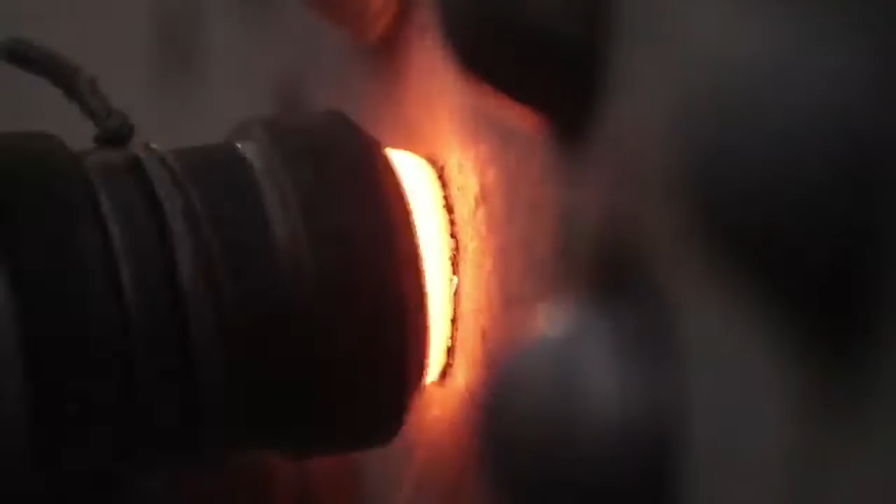But for any change to happen, you need a vision fueled by an ambition. Because everything happens twice, first in the mind and then in the world outside.

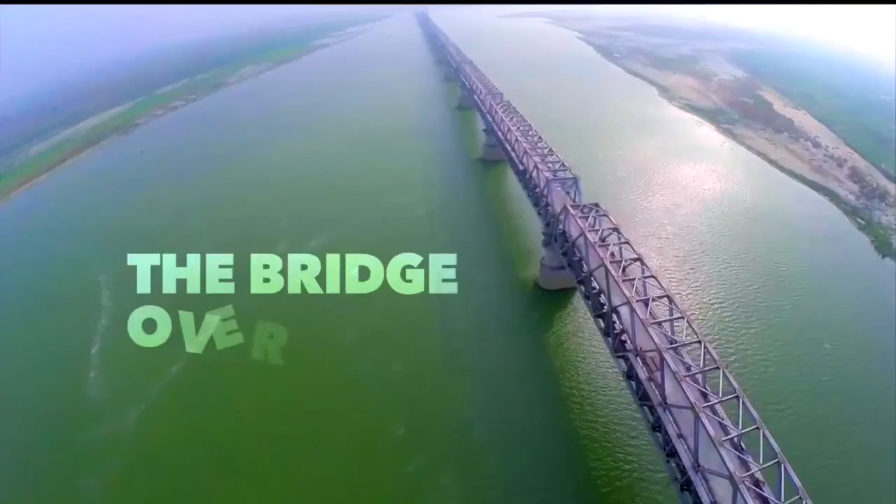The river Ganga, ancient, revered and sacred. Originating from the Himalayas, it reaches the plains, flowing merrily as it meanders its way through the Gangetic plains. By the time it reaches Bihar, the Ganges basin has extended to about 700,000 square kilometers, and the river becomes a white giant that separates the state in two.

With passage of time, this divide has led to an unequal distribution of resources and opportunities in the state of Bihar. For economic potential to be tapped to the fullest, the need to bridge this divide has become critical.

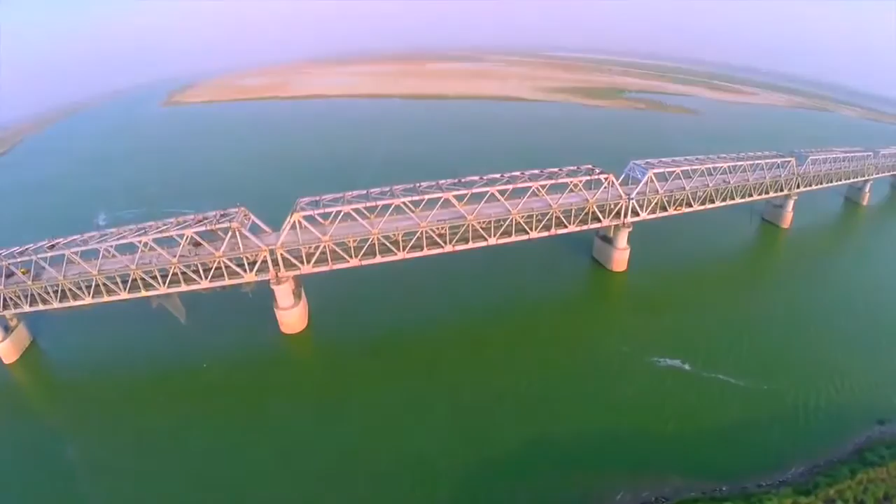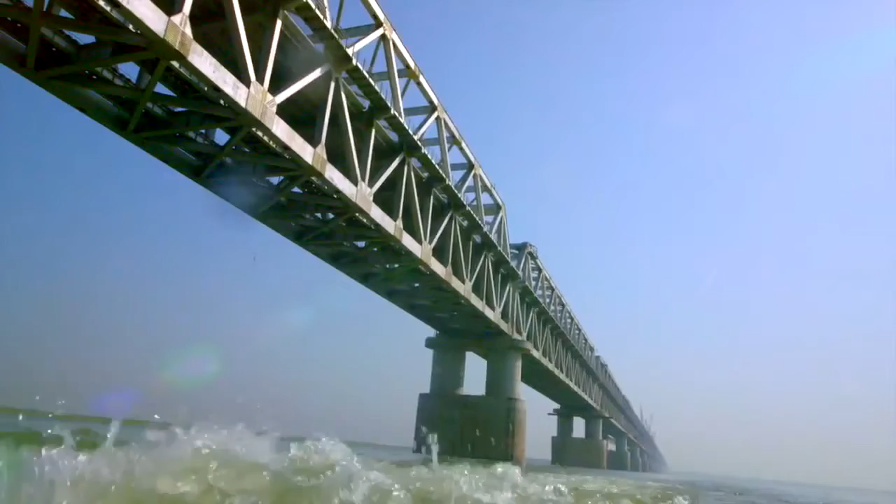IRCON was associated with this bridge in June 2008 when the Ministry of Railway awarded this work to IRCON, and since then there have been various developments over a time span of about 7 years, and now we are seeing the end of the work and commissioning of the railway line, which is going to link the southern part of Bihar across the river Ganga to northern Bihar.

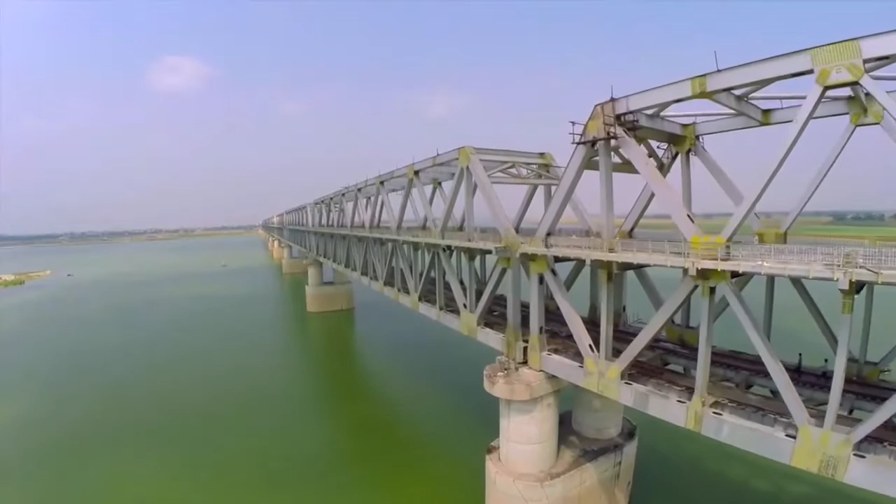36 spans of 123 meters along with 2 shore spans of 64 meters each, and 2200 tons of steel in each of these spans and 100,000 rivets. This is the longest and the heaviest superstructure on Indian Railway.

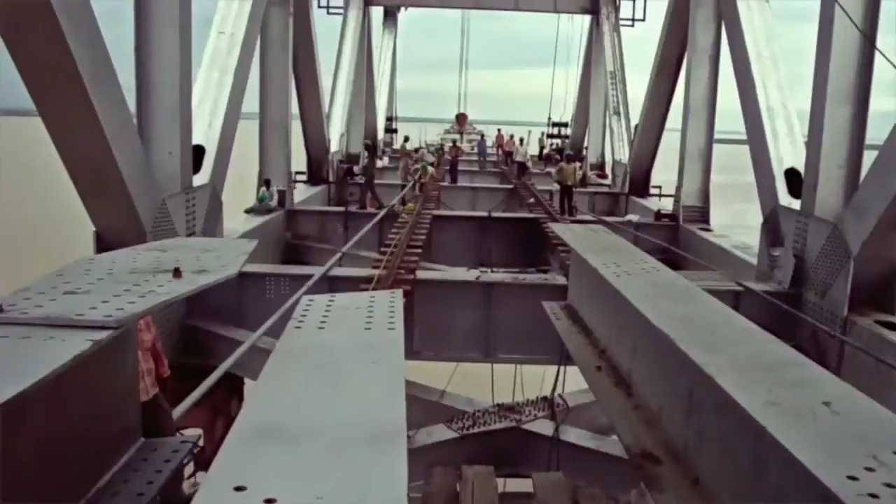The erection of superstructure started in September 2010. Floodplains were reclaimed with boulders and earth filling to construct the first anchor span, and within a span of 4.5 years, all 36 spans of 80,000 metric tons of steel were mounted over River Ganga. This 4.56 kilometer bridge is Indian Railway's longest truss bridge.

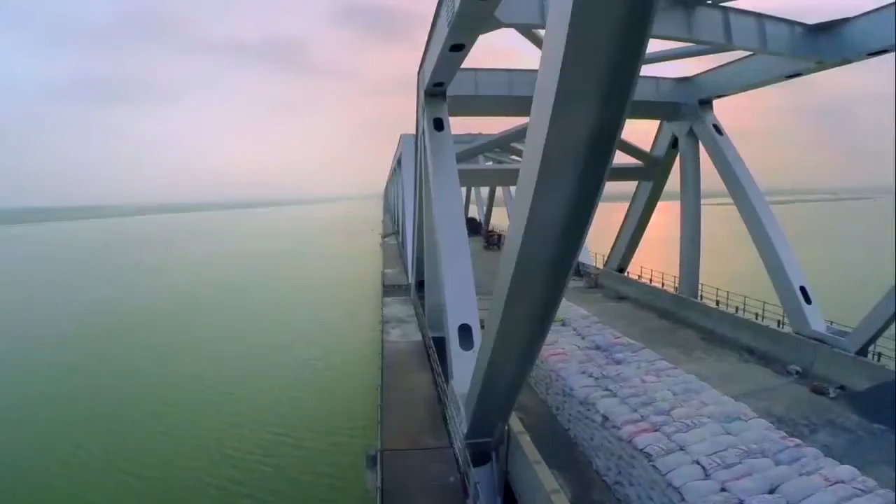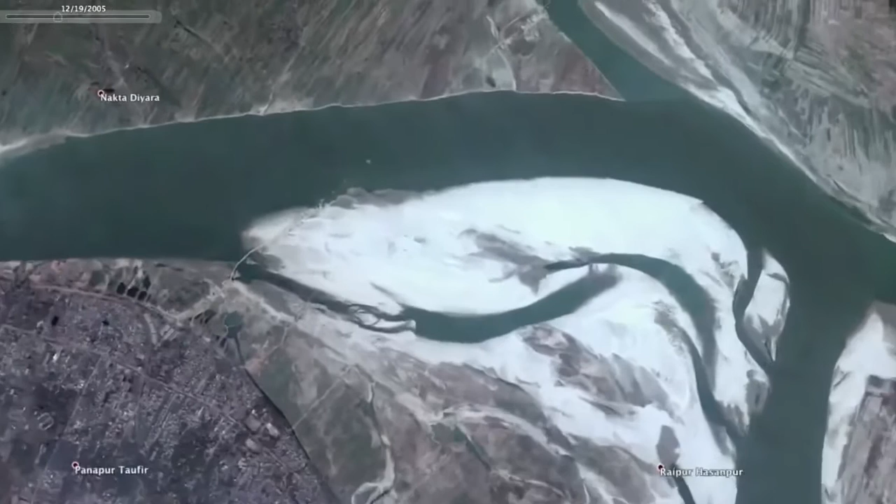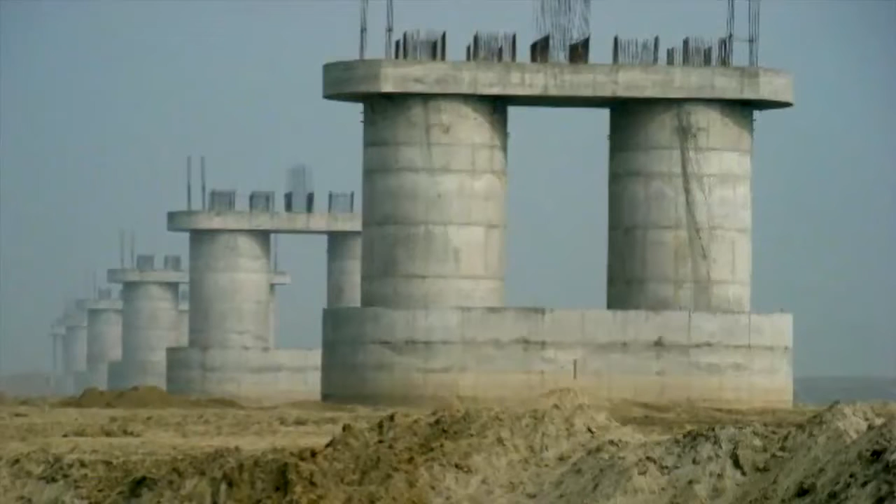The foundation laying had already begun in 2002. It was decided by the ministry to add a roadway above the railway track. By that time, the foundation and the substructure were already complete.

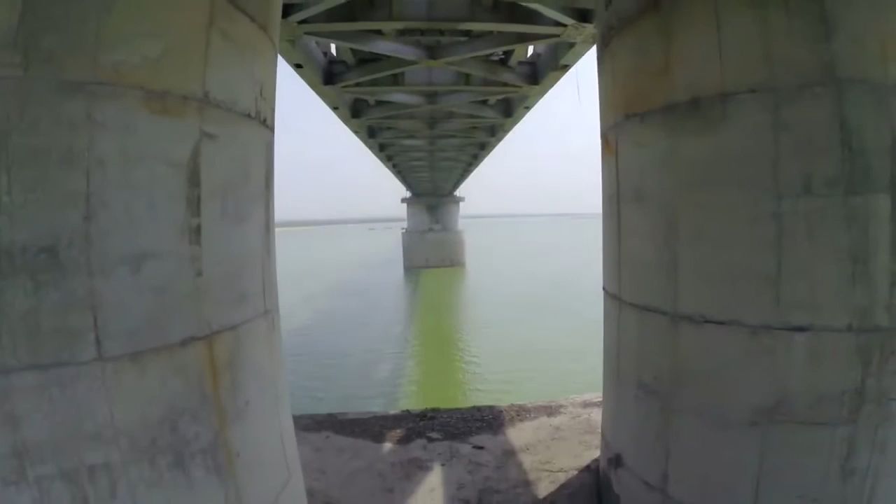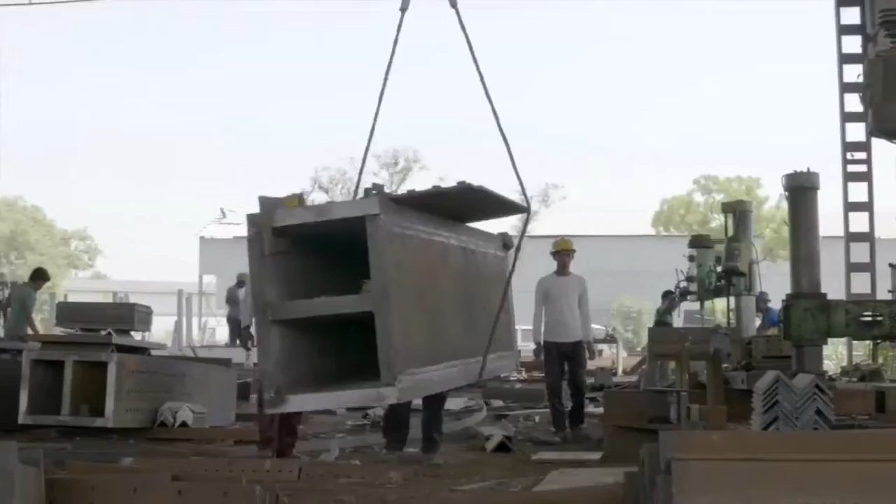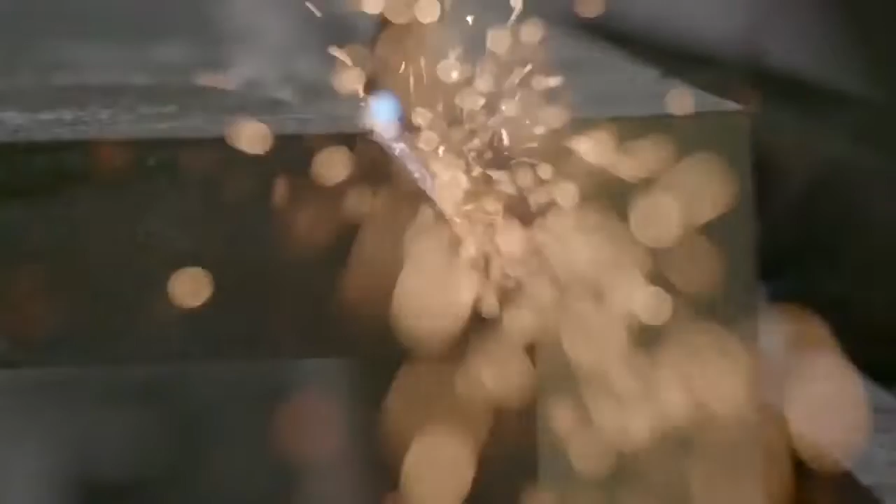To optimize the steel work, we had to go for higher grade of steel E450 so that the overall tonnage of the steel could be reduced, the dead weight of the superstructure could be reduced. But nonetheless, we had to use members as thick as 62 millimeters. Fabrication with 2.5-inch steel plate was itself a task.

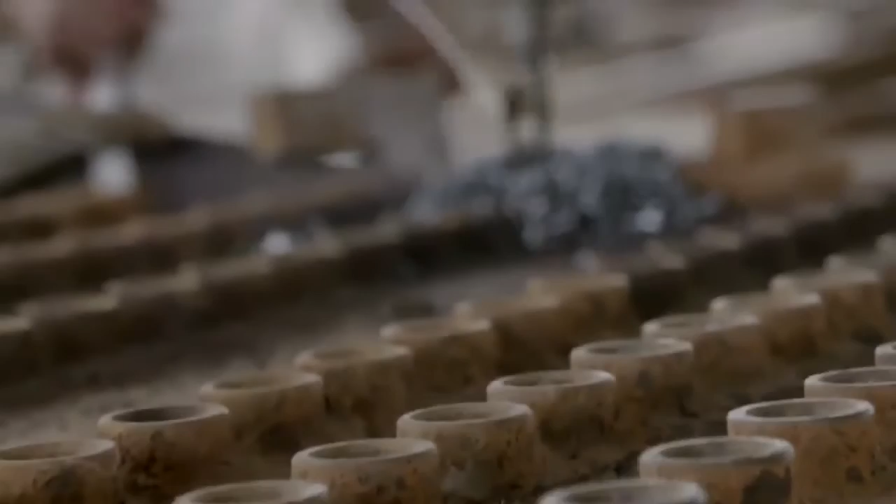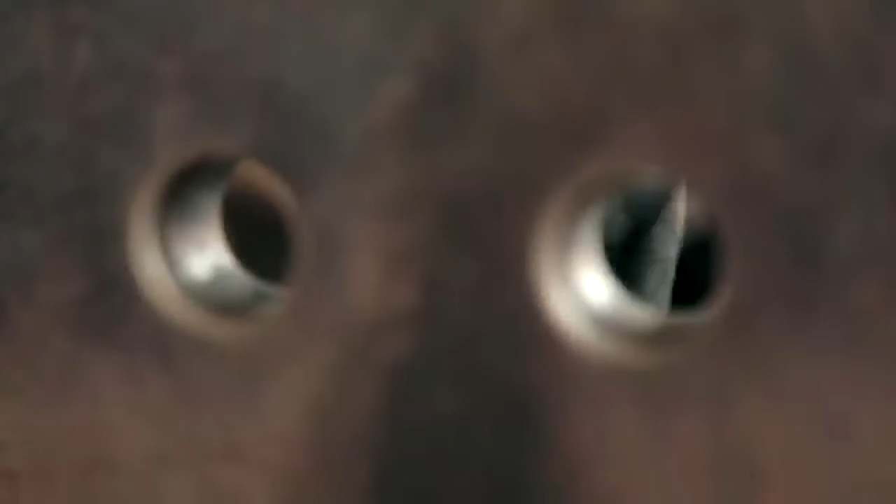Special radial drills and guide jigs become essential when numerous identical drill holes are needed in large numbers. The drill needs to be precise and absolutely correct in position. Once drilled, these plates will become part of a bigger steel component of the bridge superstructure. Then, these plates are welded to form a member of the steel truss.

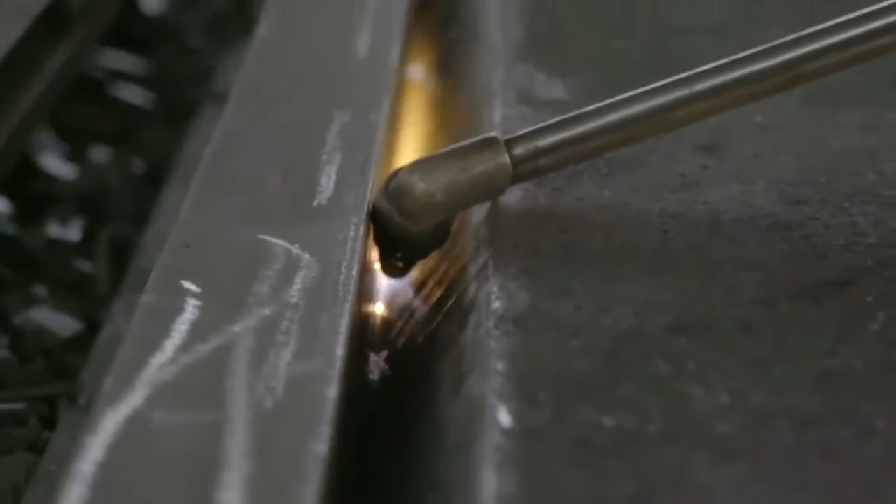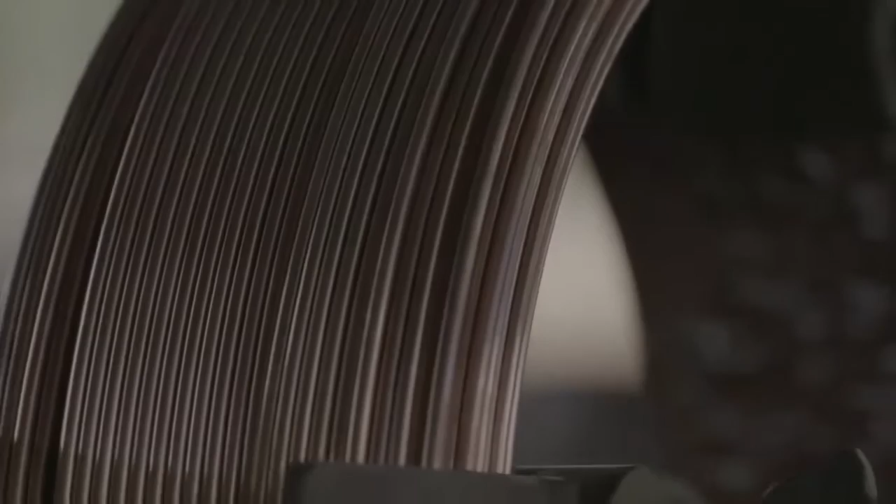A special welding technique, submerged arc welding, is being implemented. It involves formation of an arc between continuously fed bare wire electrode and the workpiece. The process uses a flux to generate protective gases and to add alloying elements to the weld pool. When molten, the flux becomes conductive and provides a current path between the electrode and the workpiece.

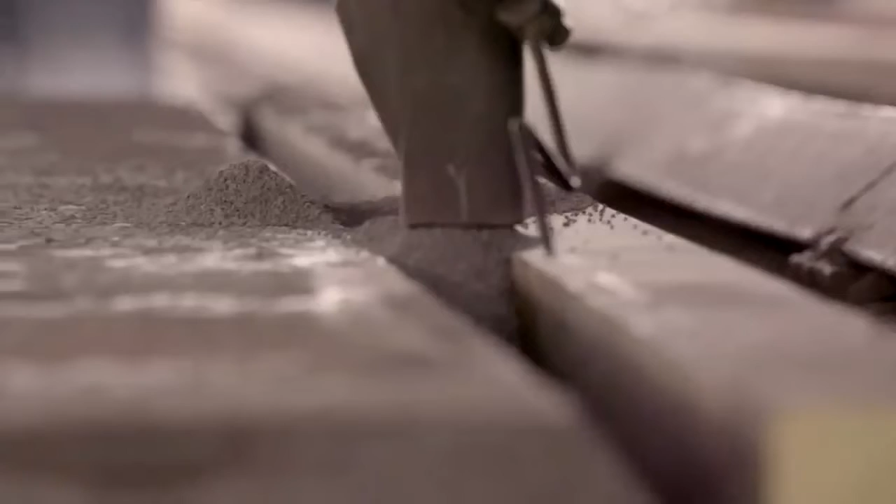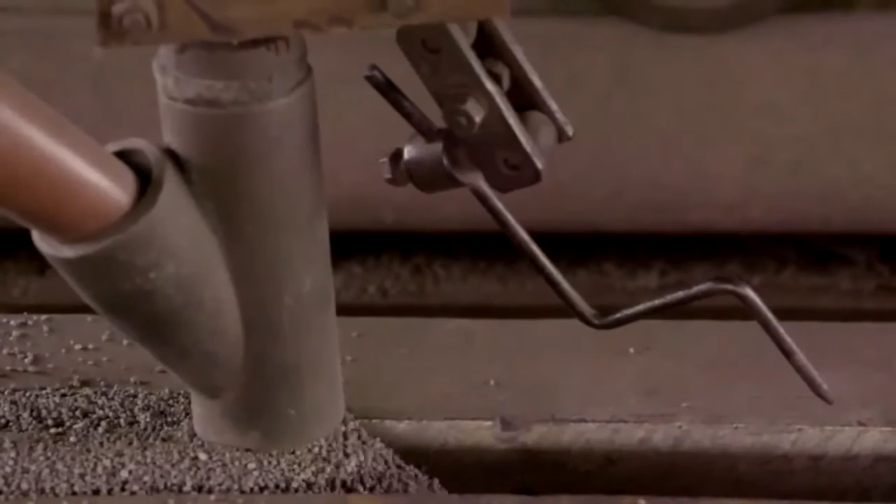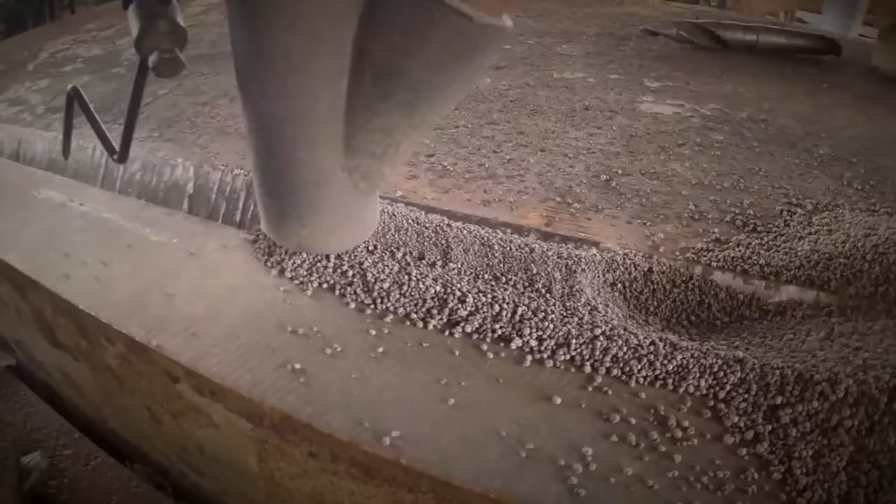The molten weld and the arc zone are submerged under a granular fusible flux consisting of lime, silica, manganese oxide, calcium fluoride, and other compounds. This prevents any atmospheric contamination. Since the operator cannot observe the weld pool, great reliance must be placed on parameter setting and positioning of the filler wire. As the arc is completely covered by the flux layer, heat loss is low. There is no visible arc light, the welding is spatter-free, and there is no need for fume extraction.

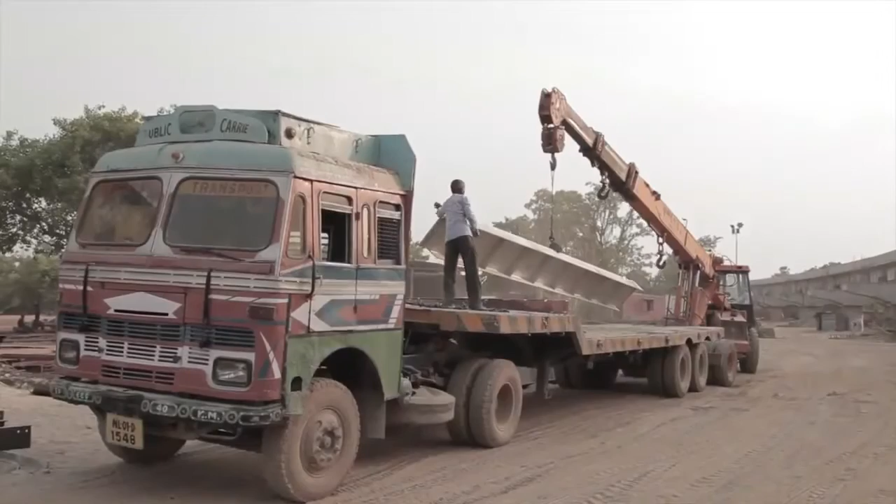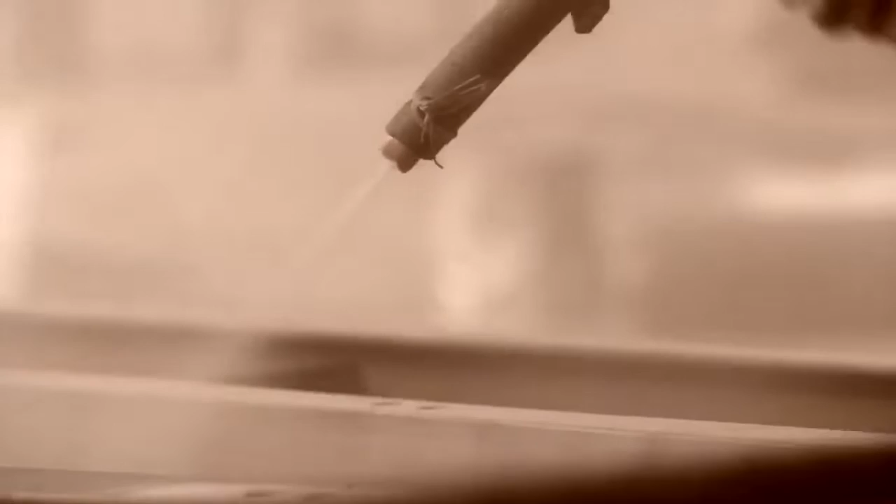Once the steel is welded, it is thoroughly checked for perfection by dye-penetrant testing. Here the white color shows the weld is seamless. The prefabricated steel components are then sandblasted and metallized. Sandblasting involves propelling very fine bits of sand at high velocity to clean the steel surface. Once sandblasted, the steel is metallized with a coat of aluminium. This will provide environment and corrosion protection to the steel for decades.

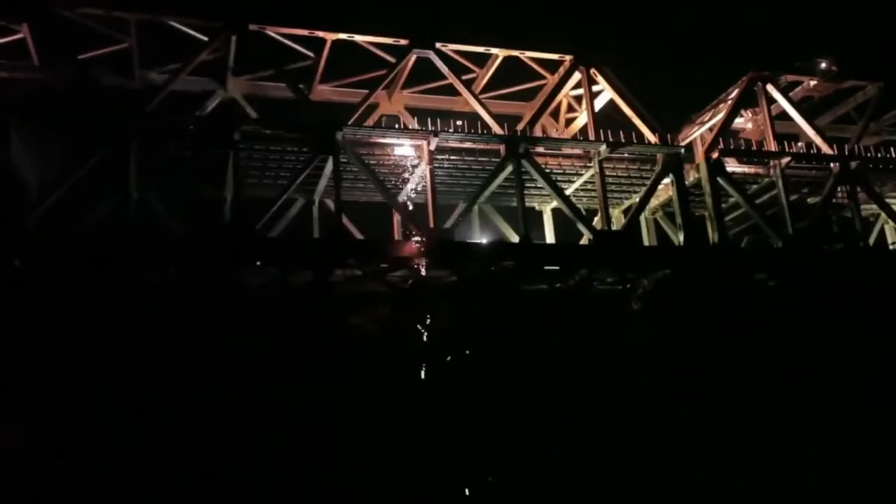The steel truss cantilever bridge was a major engineering breakthrough when first put into practice. It can span distances over 460 meters and can be more efficiently constructed at difficult locations by virtue of using little or no structural reinforcements. The construction begins with one span on ground. This serves as the anchor span for cantilever cranes mounted on top of the steel superstructure.

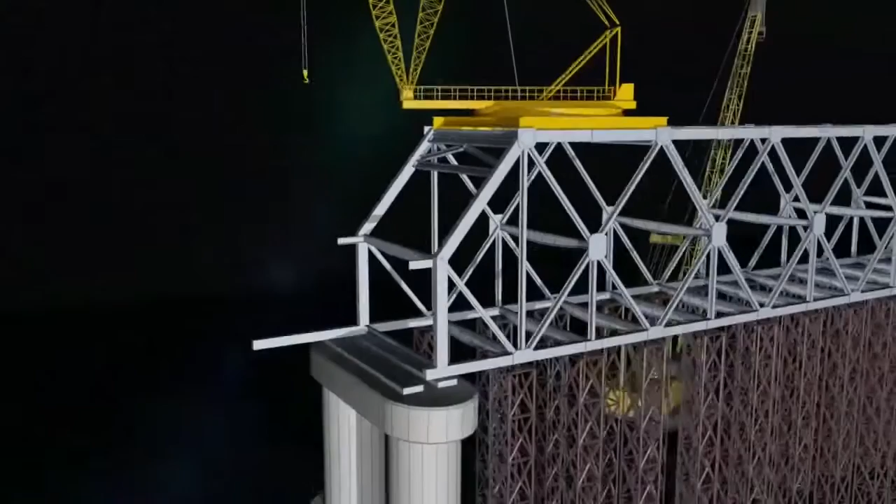Supported by a link member which holds the free end, these cranes build the next span member by member, launching ahead without any other propping from the ground. The cranes move on top, along the truss structure, adding one member at a time, forming an entire span from the free end, and land on the next pier.

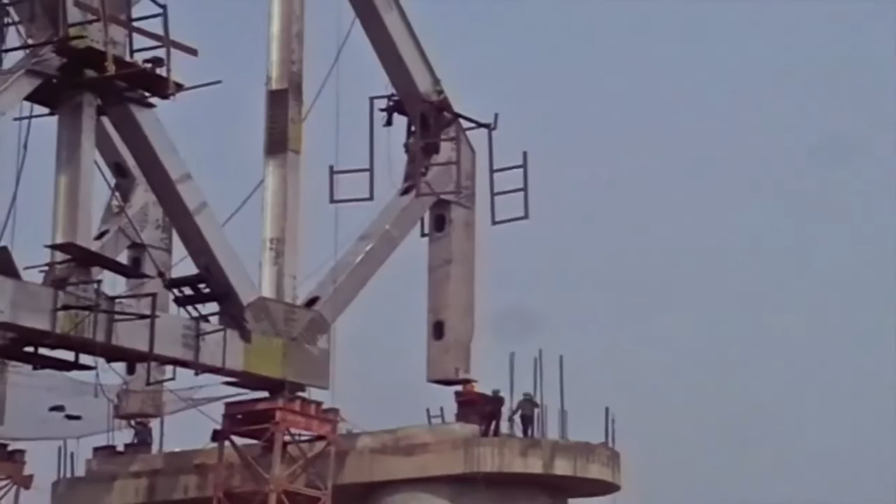Before cantilever launching of a new span, the bottom chord of the new span is blocked for any backward horizontal movement. It is done by inserting a buffer block between the bottom chord of the anchor span and the bottom chord of the new span. The vertical movement of the buffer block is monitored to assess the vertical deflection caused at the far end of the new span being launched.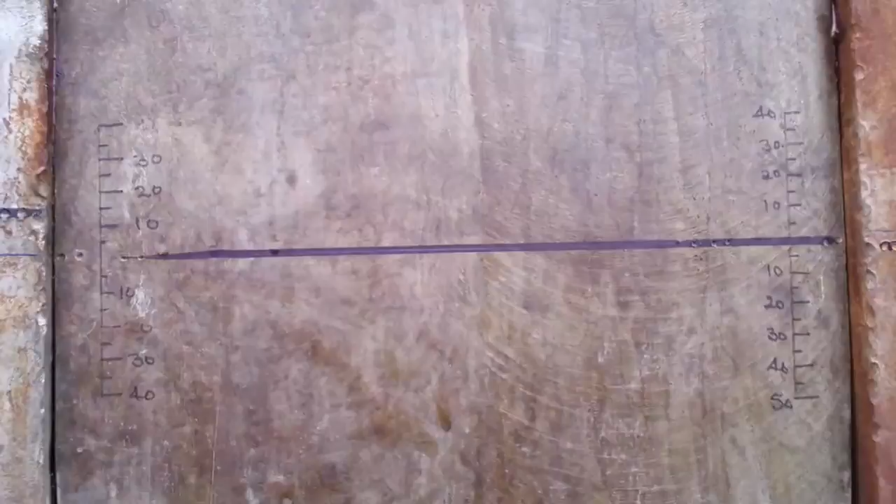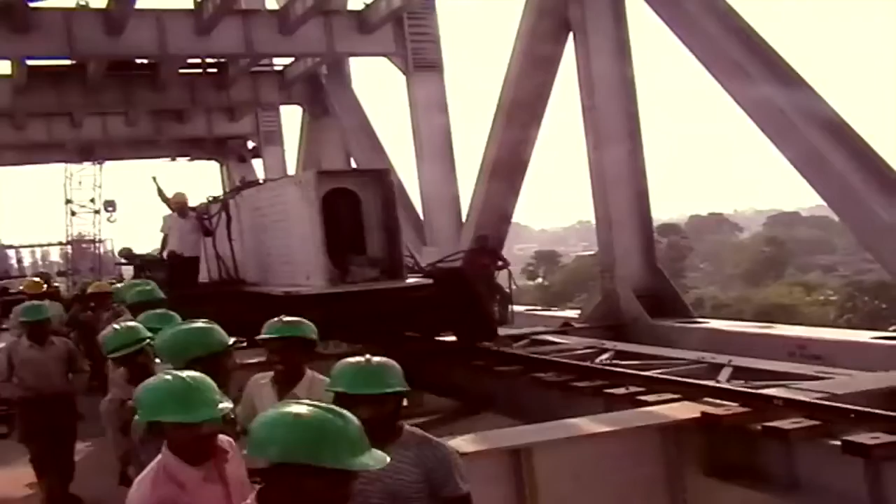For cantilever launching, the fabricated members were lifted to the rail level by ground cranes, then transported on temporary tracks. At the launch end, these members were lifted by cantilever cranes and fixed with drifts and bolts. On one single span of the superstructure, there are over 100,000 rivets.

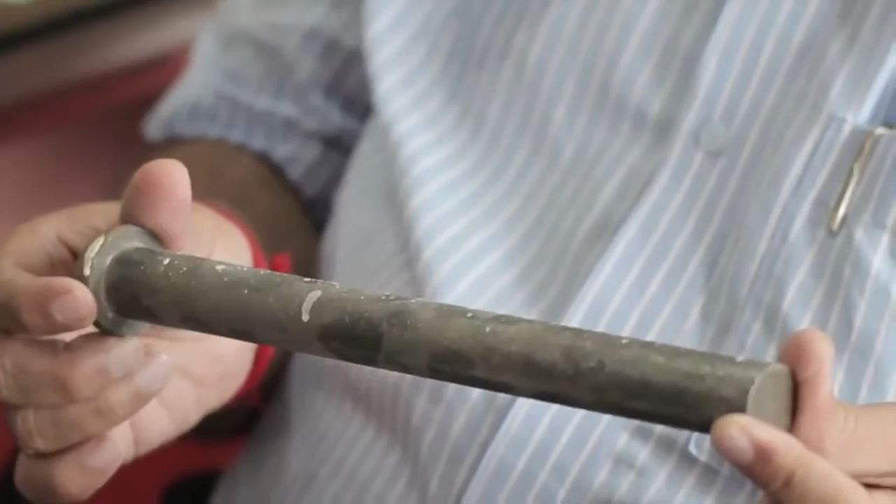A rivet is a permanent mechanical fastener. It is a smooth cylindrical iron shaft with a head on one end. The end opposite to the head is called the tail. It is heated and immediately placed in a drilled hole.

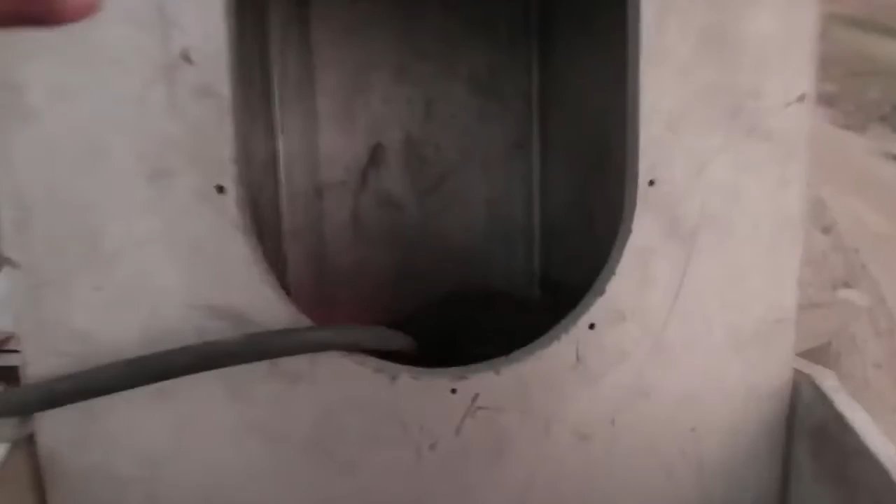And the red hot tail is then pounded to form a new head. In other words, pounding creates a new head on the other end, resulting in a rivet that once cooled has fixed itself permanently on both ends. These rivets hold the steel components fastened together permanently.

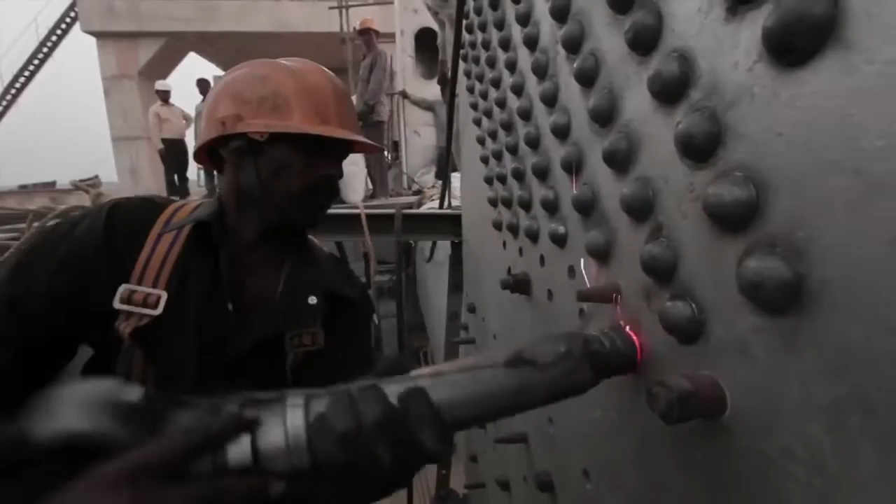In order to accomplish the task more efficiently, the engineers started construction from both sides and had plans to open a third front. But the forces of nature had something else in store for them. This island, before 2013 floods, protruded beyond this 11th span of the bridge, up to say 100 meter on the downstream side. And suddenly, in the floods of 2013, this got washed out. It was a very big challenge for us. Then how to continue with our ambitious plan of a third front?

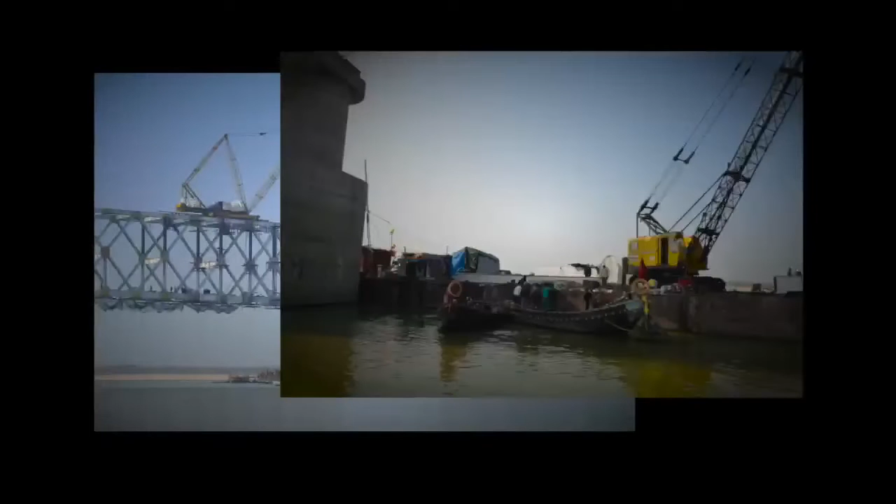And then we thought of a bigger barge. We brought a big barge of 1200 metric ton capacity, which carried material from the shore on the north end to the place of erection, and the entire material was lifted from the cantilever crane right from the barge, and erection was continued.

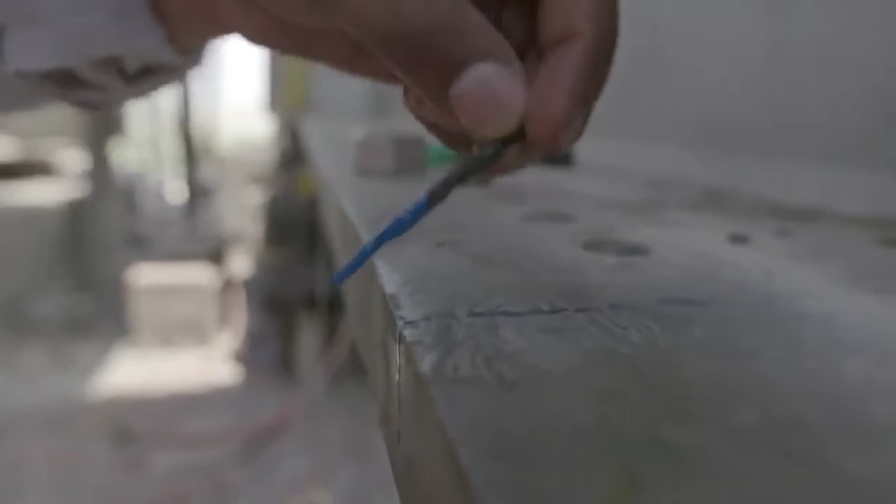And if the alignment of the truss does not match the central alignment of the bridge, the entire 2,240 metric ton truss will have to be shifted into alignment.

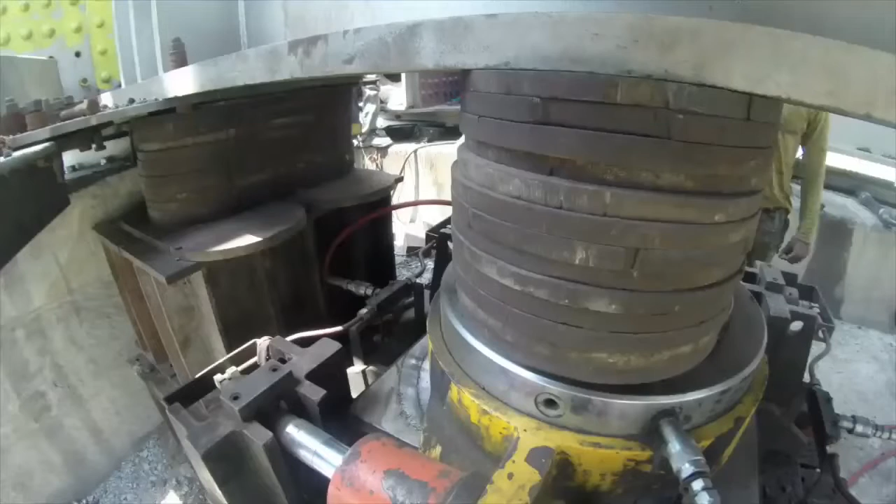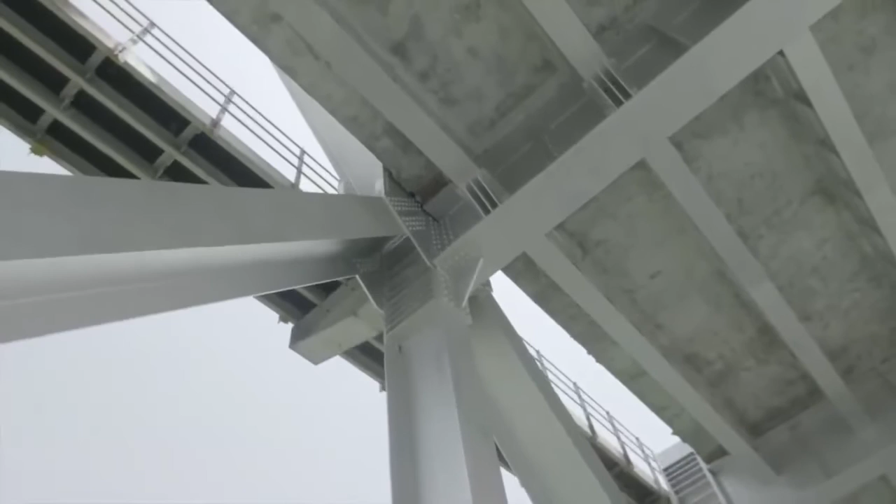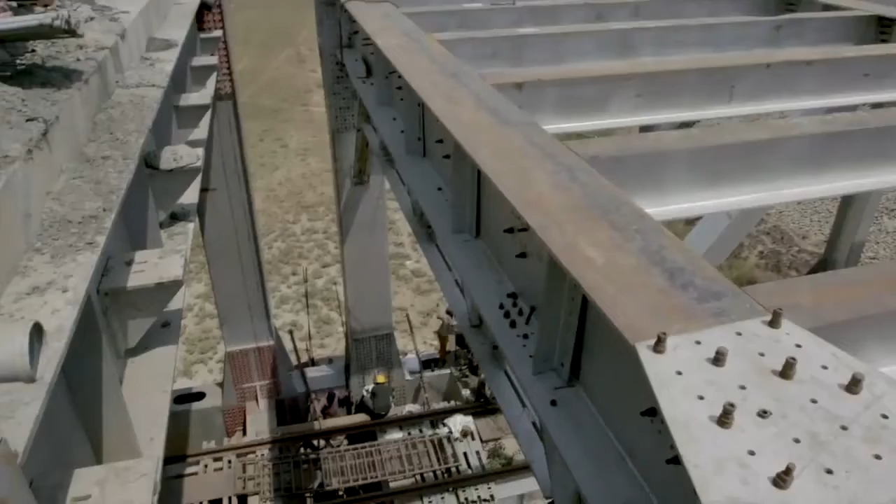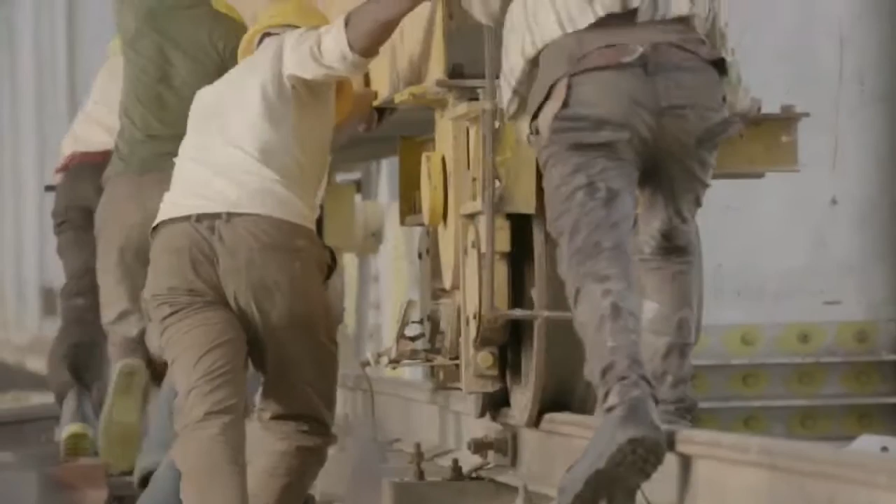To build a road deck on the second level of the steel structure, the engineers had an unprecedented challenge. The concrete casting could have been done by providing traditional support reinforcements from the rail level below. But the engineers had to find a way that would not hinder the railway work and accomplish both tasks simultaneously without affecting the other. Generally, we use props from ground, and using props from ground would have hindered the work. So we devised a method which does not use the support system.

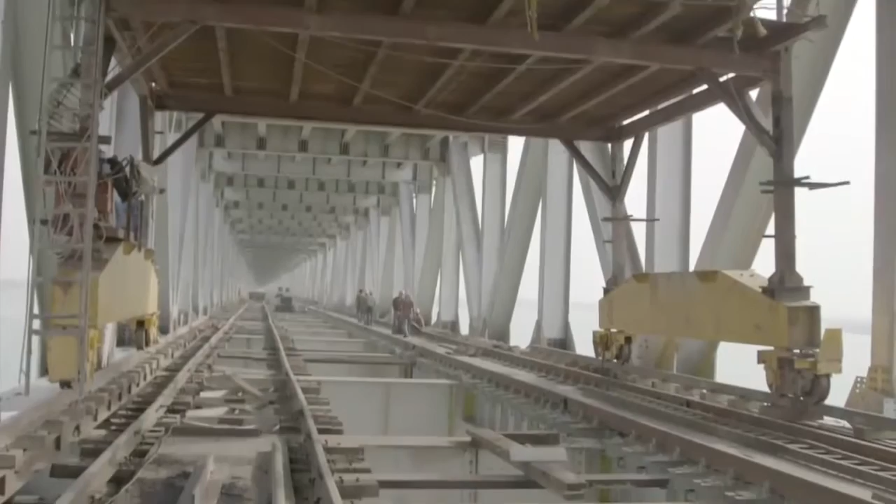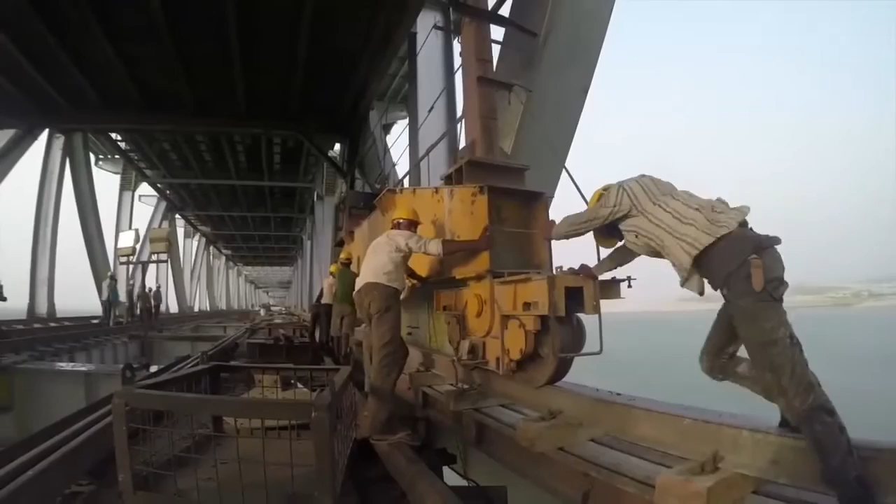As you can see here, there is a gantry, and behind me again there is a system which is independent of support from ground. So they developed a gantry that runs on the rails and holds aloft a large steel shutter that provides the support needed for the road construction above.

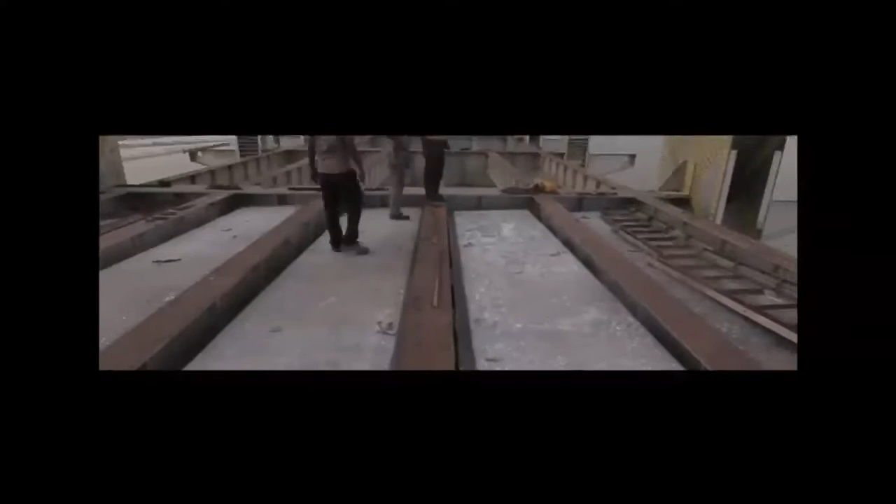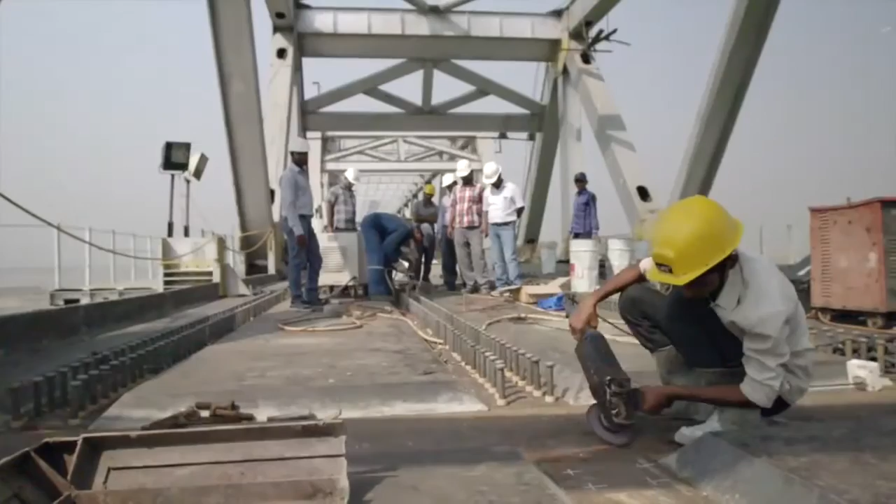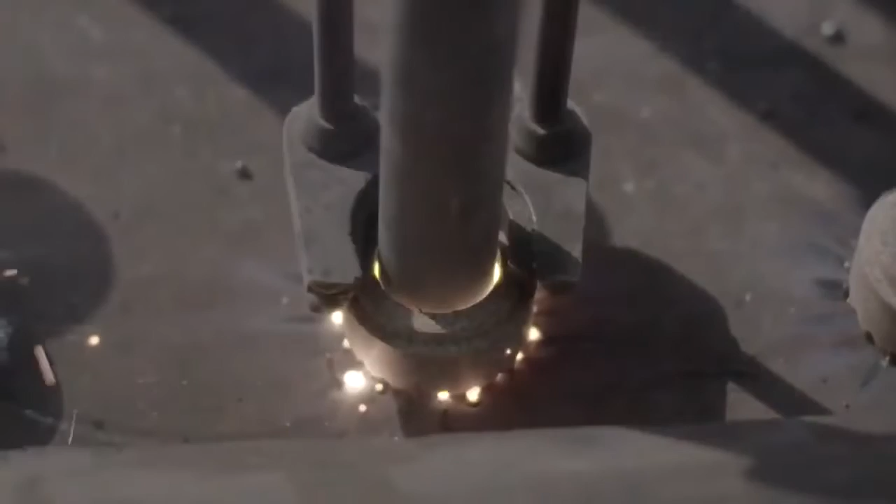On the deck, the shutter is fixed and team is welding shear studs into the steel structure. These shear studs prevent the slip between concrete and steel structure and help achieve a much stronger bond. Shear studs transfer and balance the stress between steel and concrete in a composite structure.

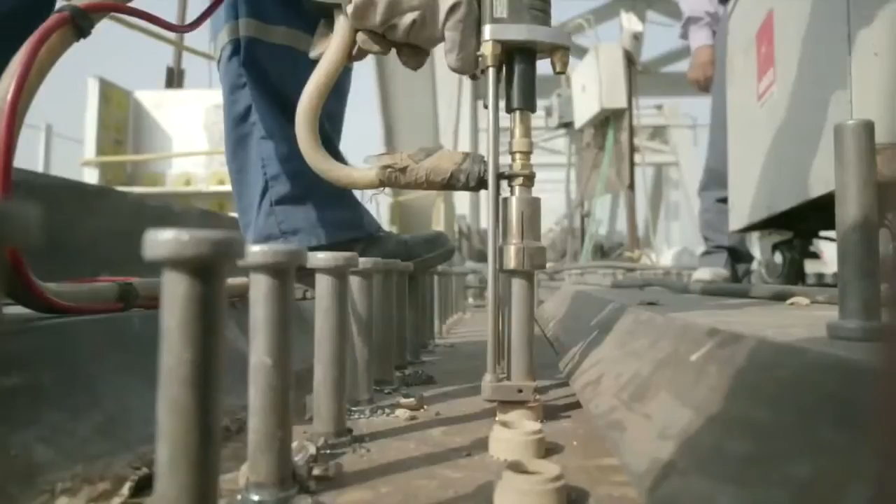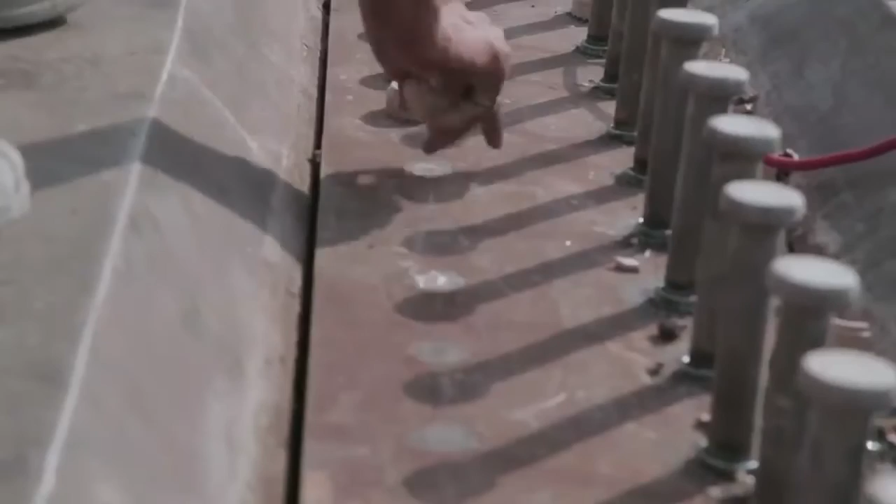Stud location and straightness of alignment of row over the steel cross girder and road stringers is marked with precision and care. Surface around welding location is cleaned by buffing wheel and made free from rust, dust and paint. The stud welding gun uses a type of flux called ferrule, a ceramic ring, which concentrates the heat, prevents oxidation and retains the molten metal in the weld zone. The ring is then broken and removed.

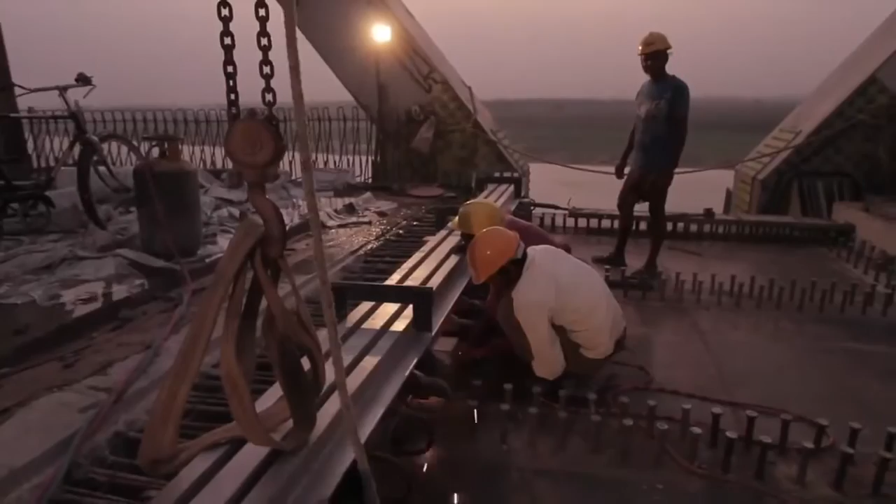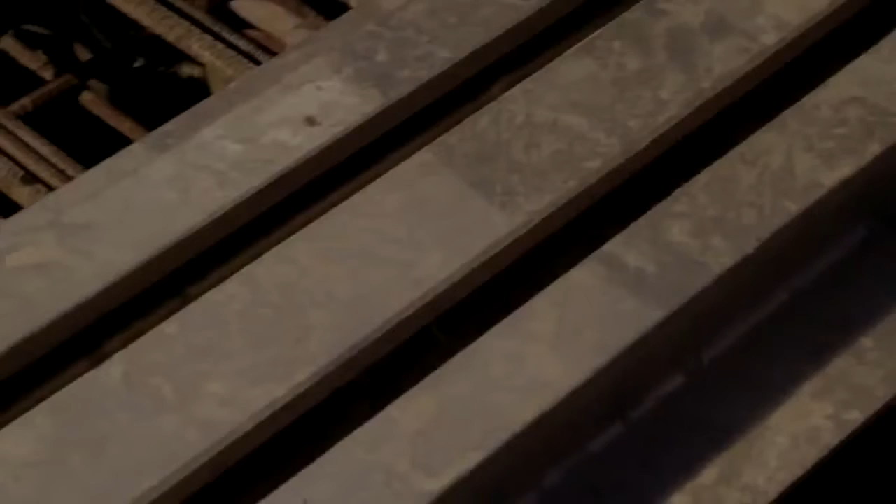An expansion joint is an assembly designed to safely absorb the heat-induced expansion and contraction of construction materials. It absorbs vibrations, it holds parts together and allows movement due to ground settlement or earthquakes. This joint greatly reduces the stress that would otherwise be caused to the main structure.

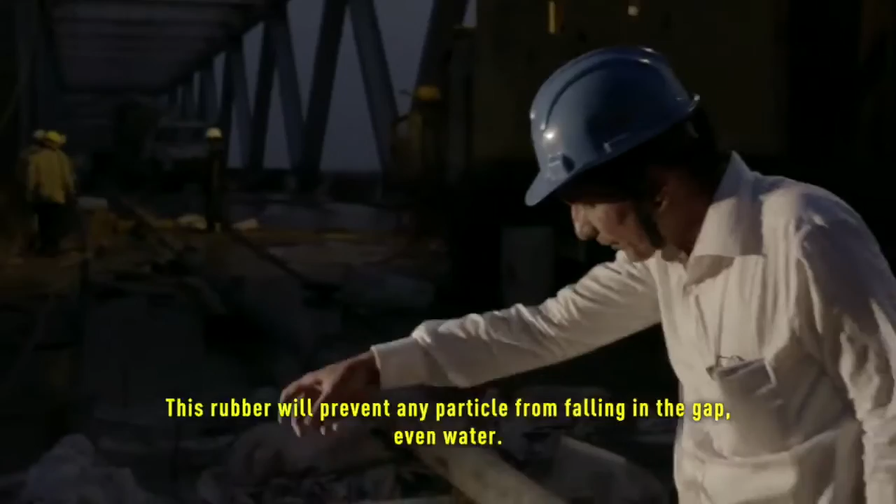The first anchor span was erected on trestles in September 2010, initiating cantilever erection from the southern end.

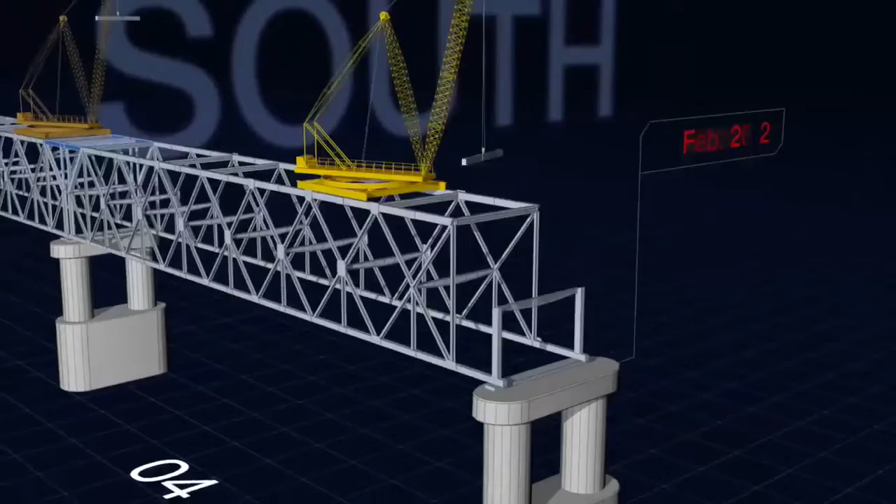While on the north side, the erection began in January 2011. Taking advantage of the dry weather, additional anchor spans were built wherever there was ground support. Even midstream, the span number 27 had a patch of land underneath, adding a third front for the cantilever erection.

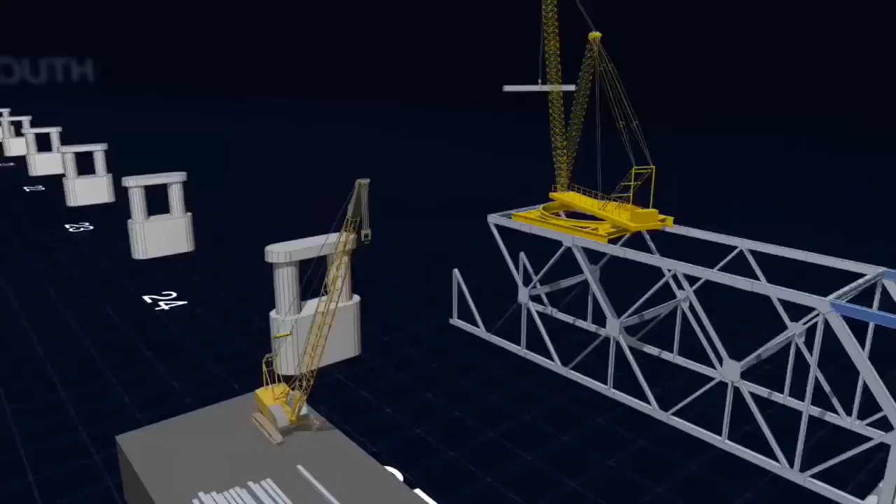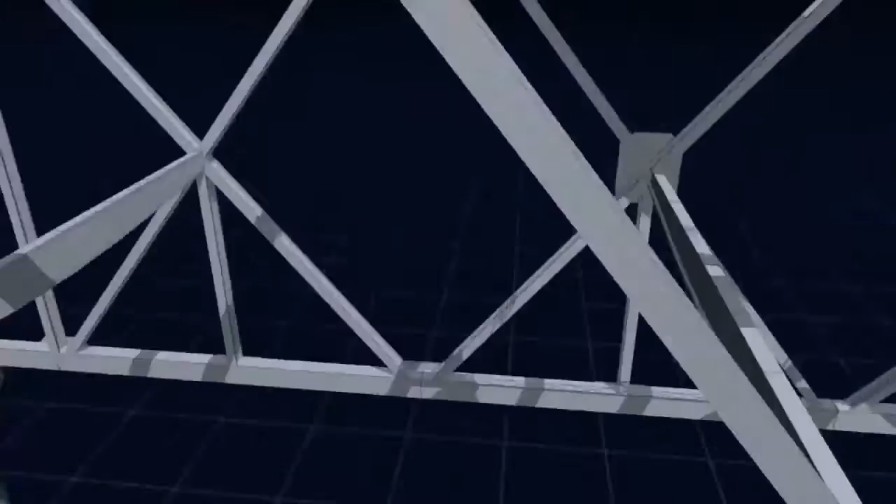But in 2013 floods, the land got washed away, so a floating barge was used to feed the material for midstream cantilever erection. This expedited the progress, and within 4.5 years, the erection of superstructure was complete. On 2nd of January 2015, when a bottom chord member was placed to bridge the last gap, the link between north and south was finally established.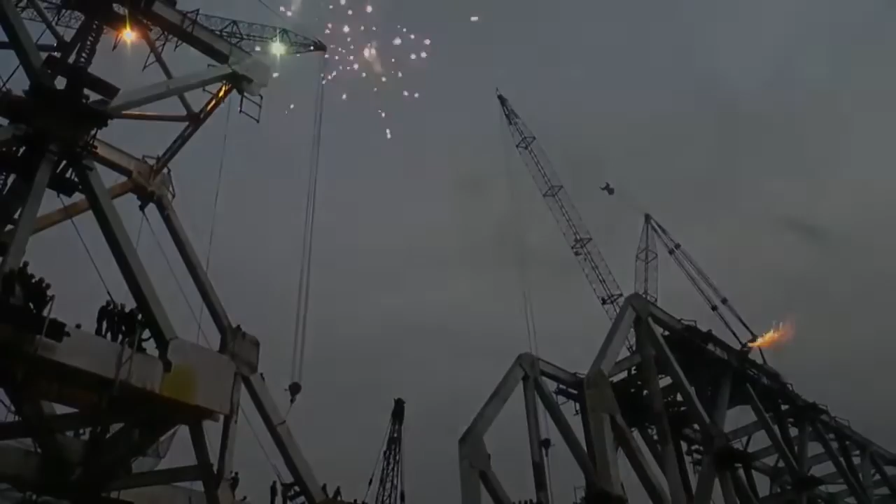Such kind of structures are not built daily or annually or every decade. Such kind of bridge may be a once in a lifetime construction, and I am fortunate that I have been associated with this bridge. Not many engineers will get a chance to be associated with such kind of a mega bridge construction.

From technical point of view also, it is a feather in the cap of Indian Railways. It is the longest Rail-Cum-Road Bridge in the country at 4.5 kilometer. Most of the fabrication is welded, and there is as much as 200 kilometer of welding which has been done for the bridge, and at joints we have provided rivets totaling almost 4 million. So these are all big achievements.

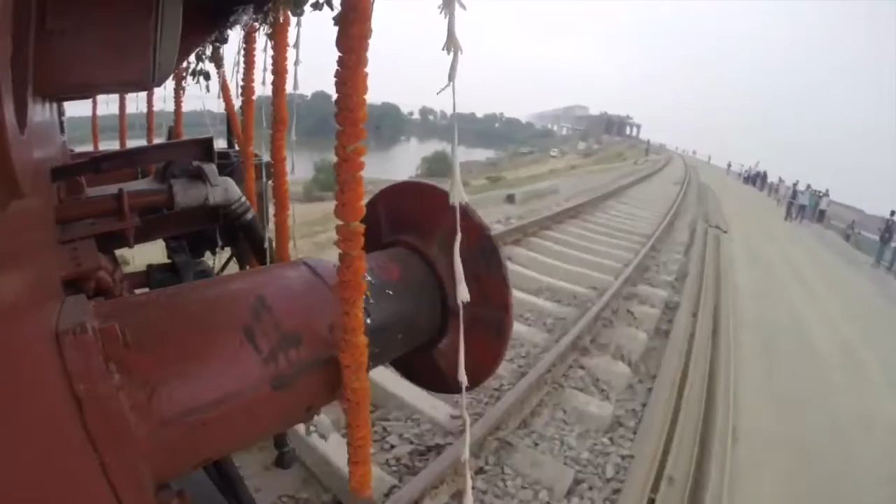Connectivity is the key to economic prosperity. When human resource is mobilized, unprecedented growth can be actualized. Job opportunities, agricultural exchange, tourism, increased productivity and efficiency are some of the immediate gains the bridge will deliver.

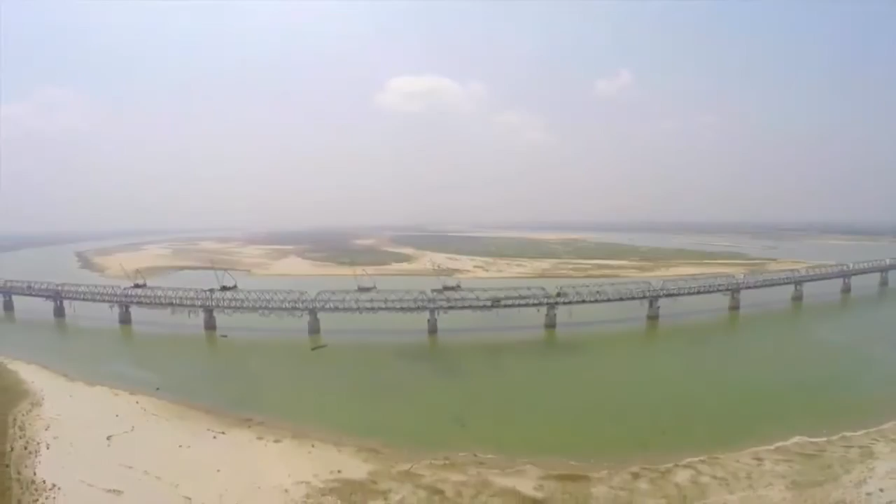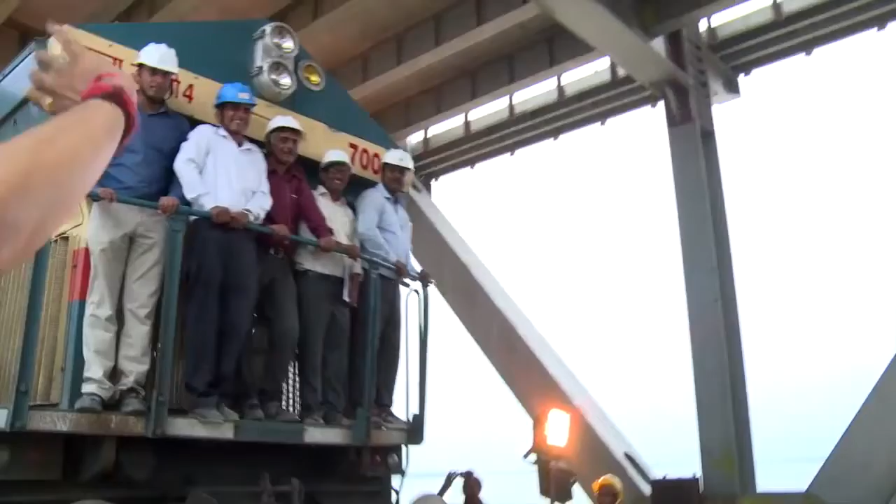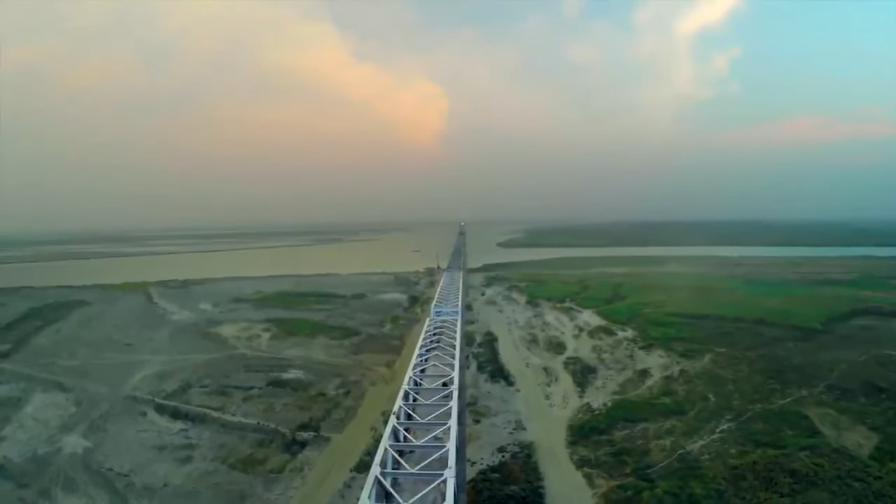However, homogeneous growth, decongestion of urban areas, and increased participation of villages to Bihar's economic growth will be the key long-term impact of this initiative. Bihar stands on a threshold of a dynamic phase for growth and development. This bridge over Ganges, connecting Patna with Sonpur, will be a turning point for Bihar.